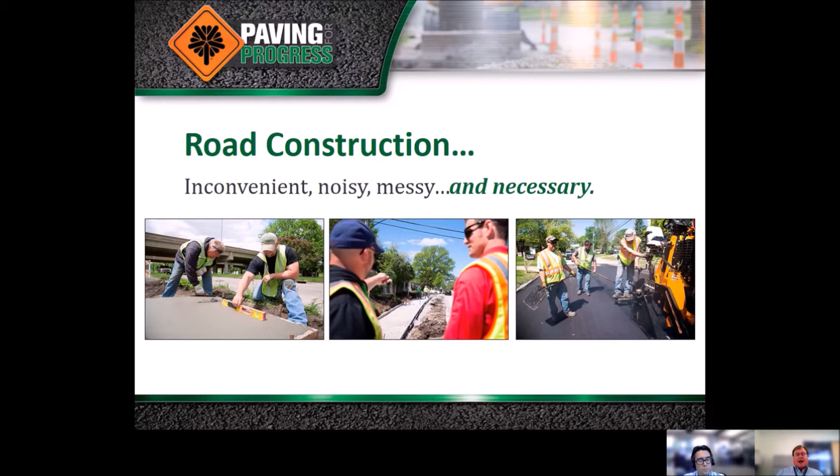So road construction, it's inconvenient, noisy, messy, but necessary. We'll do our best to make it as convenient as possible for you, working around your schedules and access to your homes, but there will be times when you won't be able to access your homes while the construction is going on. We will be able to let you know ahead of time when that's going to happen, but please be patient as we work through the projects.

So what is Paving for Progress? Well, it's the local option sales tax that was approved by voters in November of 2013 and reapproved by voters in November of 2021 to fund street rehabilitation, reconstruction, and maintenance programs throughout the city. It's a strategic data-driven plan where we work on residential and main streets. We work on some streets for proactive preservation, which is why you'll see us working on streets that you may not think are that bad right now, but that's a less costly option than going complete rehabilitation or reconstruction. The goal of the program is to stop the deterioration of our roads.

We're very fortunate to have this voter-approved funding source. It's a unique asset for our community, and of course, it's a way that we get people who drive on our streets that don't live in Linn County to help pay for it.

So with Paving for Progress, we get an additional $18.5 million annually for street rehabilitation and reconstruction. Through 7 years, we've invested $116 million. In the 10 years prior to that, we sold bonds up to $55 million. So we have more than doubled our investment in just 7 years in our roadways. Another good thing about this is we're not selling bonds to do this work. We're paying as we go, so we don't incur debt. And we can make more permanent repairs versus temporary repairs, such as yearly pothole maintenance. This also helps us reduce the burden of maintenance on our streets crews so that they can do other work.

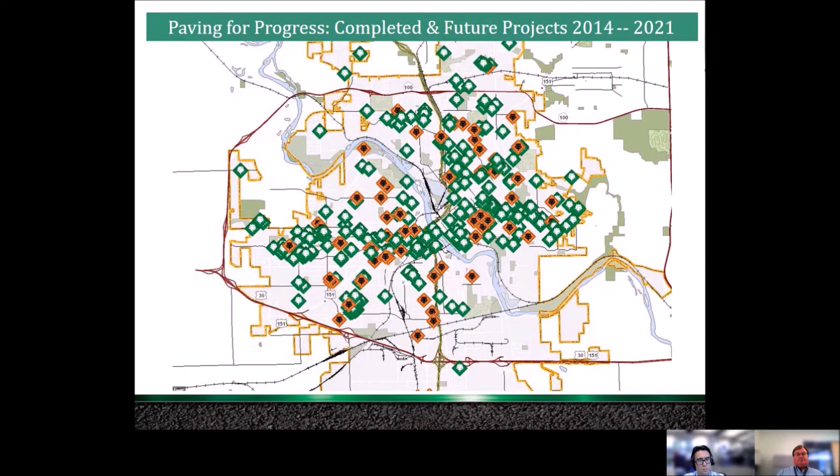So contractors versus city crews. Because of state law contracts, we have to look at how much the bids are for each project. So big contractors are great at large scale projects, specialized work and multiple types of work in one project area, but city crews are better for small scale projects, more maintenance activities, smaller, shorter streets with cul-de-sacs and strict timelines.

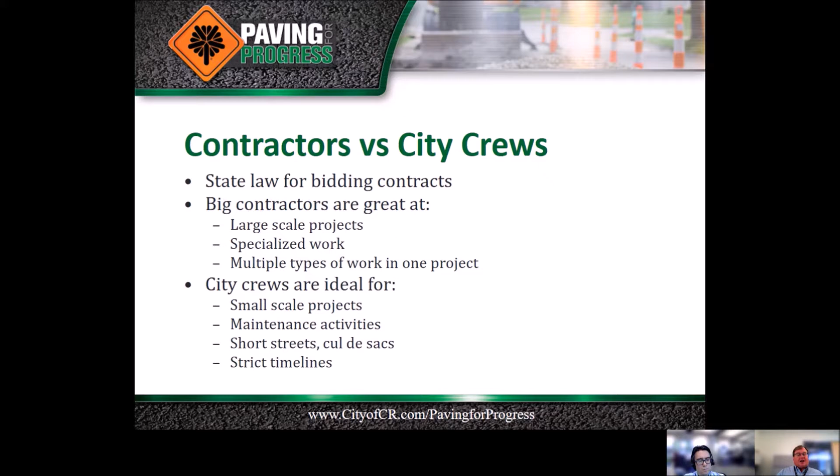And with that, I'll turn it over to Mike Duffy. Okay, thank you, Doug. My name is Mike Duffy. I'm the Street Operations Manager. I'm going to talk about some different types of projects that may occur in residential neighborhoods.

The first is concrete patching. So this is where we come in and remove and replace damaged concrete panels. This would not include some of the minor cracks that you might see along a panel, but we do identify areas where we think that a minor crack may become a bigger problem, whether that pavement is undermined or if there's something going on underneath the pavement that maybe would indicate why the cracking is occurring. Our goal is really to extend the life of the roadway and get the most use out of the current roadway that's there. Some additional work that may be needed that does impact along a project would include adjustments to driveway aprons. That's the place where the driveway actually meets the roadway.

Some spot curb repairs, so areas where a curb has been damaged or is missing, that we will go in and do those sort of spot curb repairs and replace those.

Any sidewalk ramp replacements, so this would include any of the ADA ramps that would not be compliant. We will bring those up to compliance.

Storm sewer intakes, so any location where the curb and gutter section meets a storm intake, we will then, if needed, repair and make those repairs at that time. This work is performed by city crews and is just part of our regular service to the community.

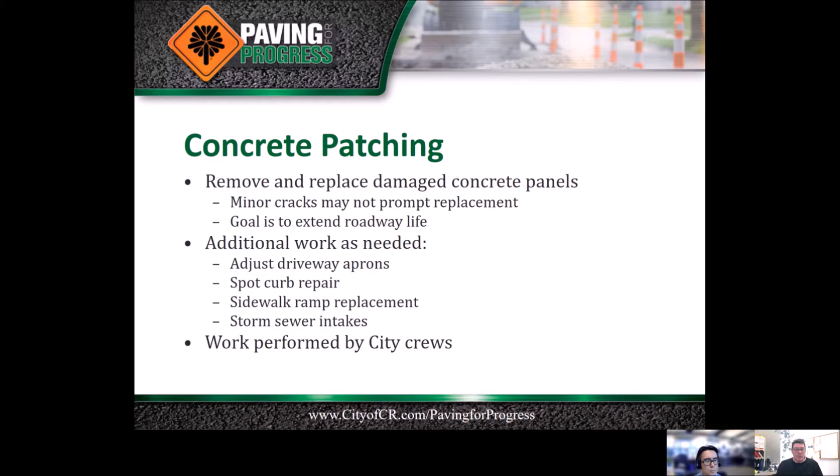Some typical impacts that may be of interest. Lane reductions are probably the most common. So one of the things that will happen is if we're doing one side of the pavement, we'll have to close that side. We do maintain traffic through residential areas. In some instances, we may limit the direction of flow, but those lane reductions are really for keeping our crew safe and for allowing people within the residential areas to still travel those roadways.

There also will be times that we'll have to do individual driveway closures. We do communicate those to the property owners so that they know when they are going to occur. It's only where patches are needed in front of a driveway or where a driveway taper or a section of a driveway is being reconstructed. The average closure time for a project can be up to 2 weeks. We do try and open up those driveway areas much shorter than that, and we ask that you utilize nearby on-street parking during those times.

One thing that's very important on a project is watch for the temporary road closure signs or the no parking signs. This allows us to come in and place a no parking sign in an area where we're going to need to have equipment or where we'll be removing pavement. We ask that you not park in those areas when those signs indicate not to.

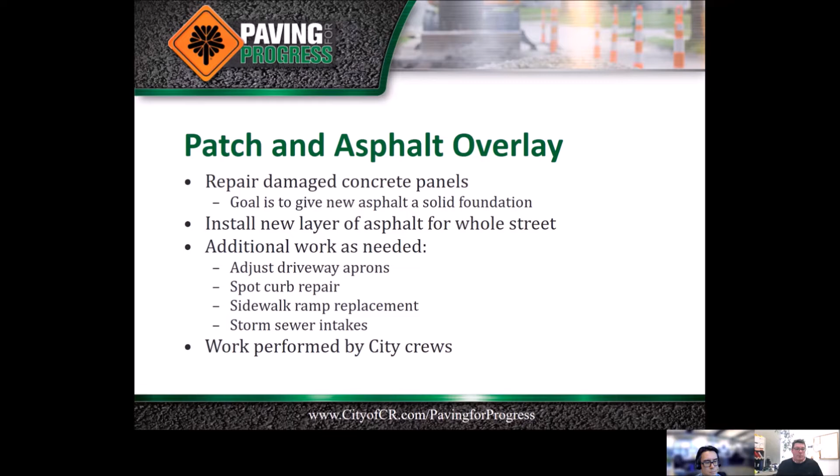We are doing spot curb repairs in many of these locations, so that gives us a good edge to our asphalt pavement and allows for drainage to flow along that curb line. We do the sidewalk ramp replacement, so any ADA work that we have to do at sidewalk ramps, we would do that at the time that we're doing construction, and we do adjustments at the storm sewer intakes. Again, the city forces will be providing this service.

Some of the typical impacts for these types of projects are lane reductions for patching, primarily for the concrete work. When we do an asphalt overlay on a street like this, it will be closed while we are placing the asphalt. This allows the material to cool, and we will coordinate with property owners to let you know when we are going to be doing those asphalt overlay projects.

Individual driveways could be closed during this time period. Again, we will provide some advance warning when we're going to be doing this type of work, only where patches are needed in front of driveways. But when we do the overlay work, there will be sections of roadway with new asphalt that will not be able to be driven on.

Average closure for the entire project will be up to 2 weeks. At the time that we're doing the asphalt work, we have the project closed for generally about 2 days.

Utilize nearby on-street parking when possible, and watch for temporary no parking signs. When we come in with the equipment and are doing the work, we ask that you not park in the areas impacted by the project.

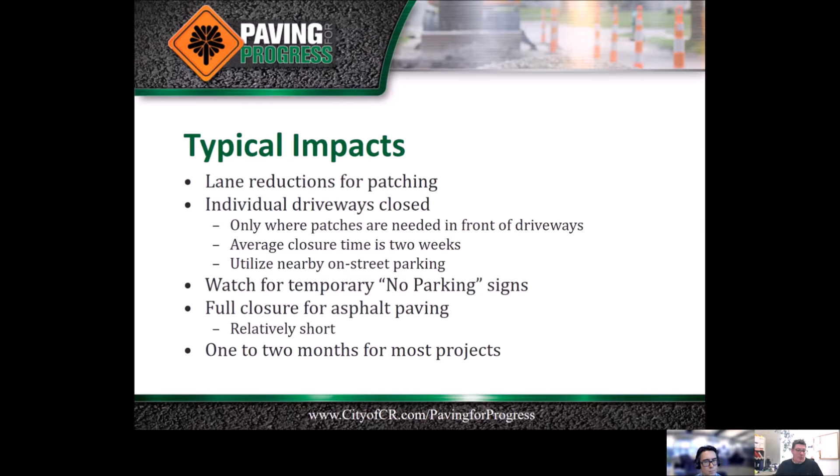Full closures for asphalt paving are generally relatively short. We come in, we do the work. Once the asphalt cools, we get traffic onto that pavement right away. Most of the projects, from start to finish, take 1 to 2 months to complete.

Common concerns: service impacts. We're often asked if there's going to be no water or sewage during construction. We make all efforts to avoid that unless there's a specific location being worked on, and that would be the only time there'd be a water or sewage outage. None are anticipated on these projects.

Mail delivery is normal. There may be a situation where we have to remove a mailbox; we temporarily set those adjacent to the location where the mailbox is. That generally occurs with any curb or driveway reconstruction we have to do at the time of construction, and those are coordinated with the property owners.

Waste bins need to be placed at the edge of the property on normal collection days. If construction blocks a garbage truck, the crews are responsible for getting the bins to where they belong in order to be picked up.

Asphalt overlay projects: this is where we come in, clean and prepare the existing roadway surface, and install a new layer of asphalt. This work is provided or performed by city crews.

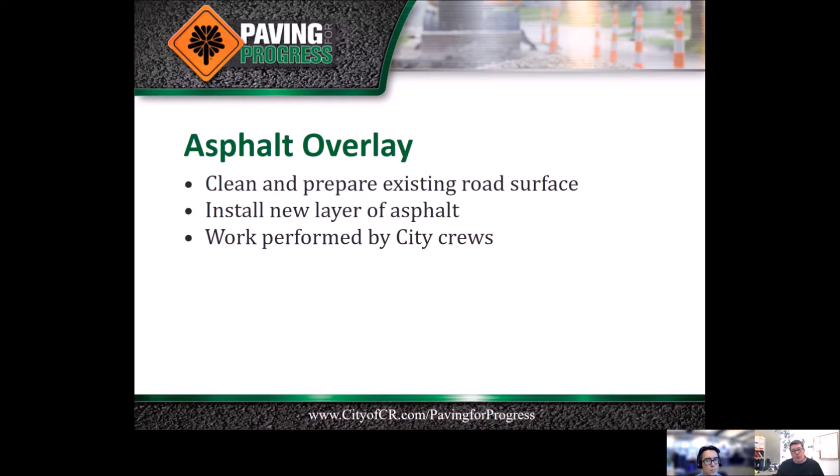On asphalt overlay projects, some of the typical impacts are a full closure during paving. While the pavement is being placed and the asphalt is being laid on the roadway surface, it needs to cool, and we do not allow traffic to drive on it. It usually takes a day for that cooling to take place, and then access is reestablished for the evening.

It works well if you're away from the home during that day. If you do need to get your car out of the driveway, do that before the project starts. Otherwise, access will be limited until the evening.

This is short-term construction. It starts and ends in a single day for the asphalt overlays.

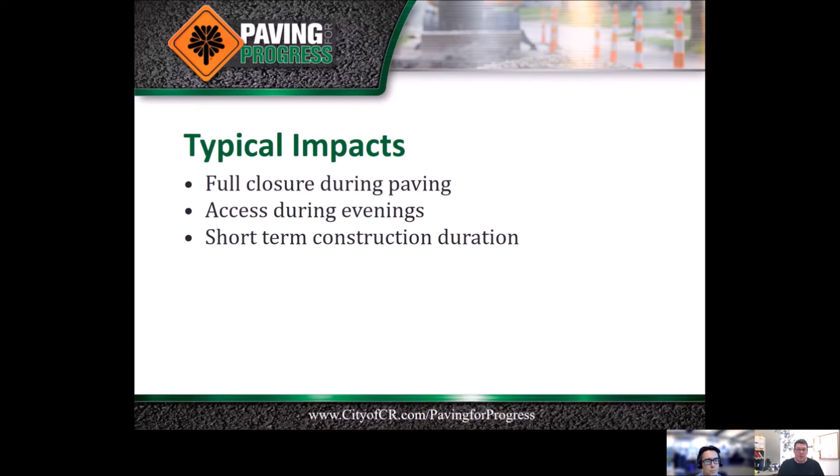Common concerns: service impacts. We're often asked if there's going to be no water or sewage during construction. We make all efforts to avoid that unless there's a specific location being worked on, and that would be the only time there'd be a water or sewage outage. None are anticipated on these projects.

Mail delivery is normal. There may be a situation where we have to remove a mailbox; we temporarily set those adjacent to the location where the mailbox is. That generally occurs with any curb or driveway reconstruction we have to do at the time of construction, and those are coordinated with the property owners.

Waste bins need to be placed at the edge of the property on normal collection days. If construction blocks a garbage truck, the crews are responsible for getting the bins to where they belong in order to be picked up.

Asphalt mill and overlay projects. These are projects where we come in and mill off the existing asphalt surface. We will then make some repairs to the concrete base, and then reapply that asphalt surface to the pavement. So that involves grinding off that top layer of existing asphalt.

There will be some noise involved in that, since it is grinding that off of the existing pavement. Some curb replacements for a couple projects in particular, that being 6th Avenue Southeast, 40th Street Drive Southeast, B Avenue Northwest, and Janice Drive Northwest.

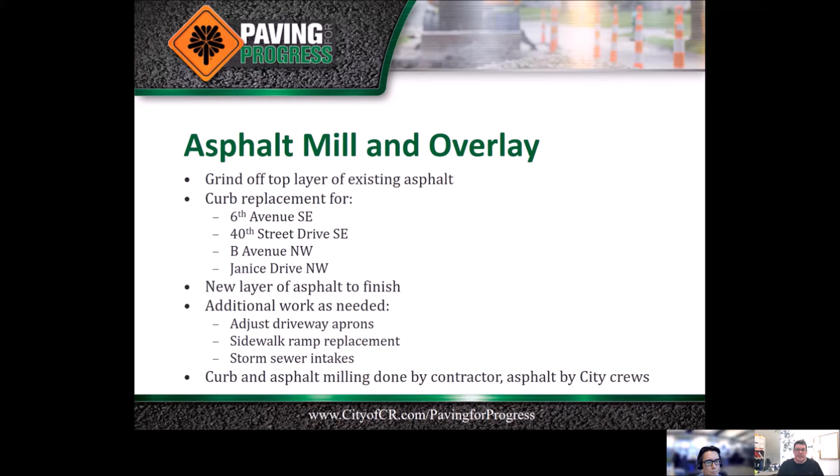Some typical impacts: lane and driveway closures during curb work. So any of the work specific to the concrete work or the base will have some closures during that time. Those are generally very specific because this is more spot work.

At the time of the asphalt work, there will be project closures that will impact the entire street. Those will again be allowed access back in the evening, so once that asphalt material has time to cool, property owners will regain access to their driveways and properties.

Access to businesses and schools is maintained during this time period. We do provide some temporary locations where you can gain access to those facilities. Watch for temporary no parking signs during this project—that's very important for us to have the vehicles removed so that we can do our work.

This type of work takes approximately 2 weeks, and it's often done in stages, so you'll see some start and stop between the different phases of this work: when the grinding occurs, when the concrete work occurs, and then when the asphalt work is completed.

Common concerns: service impacts. We're often asked if there's going to be no water or sewage during construction. We make all efforts to avoid that, unless there's a specific location being worked on—that'd be the only time there'd be a water or sewage outage. There are none anticipated on these projects.

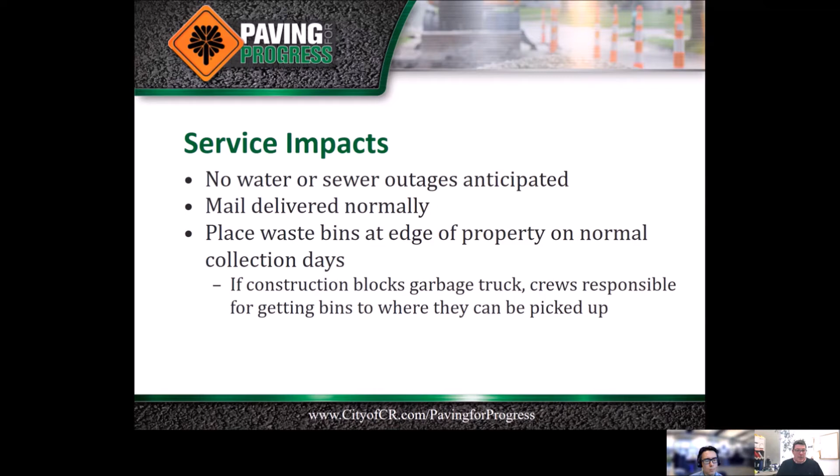Waste bins need to be placed at the edge of the property on normal collection days. If construction blocks a garbage truck, the crews are responsible for getting the bins to where they belong in order to be picked up.

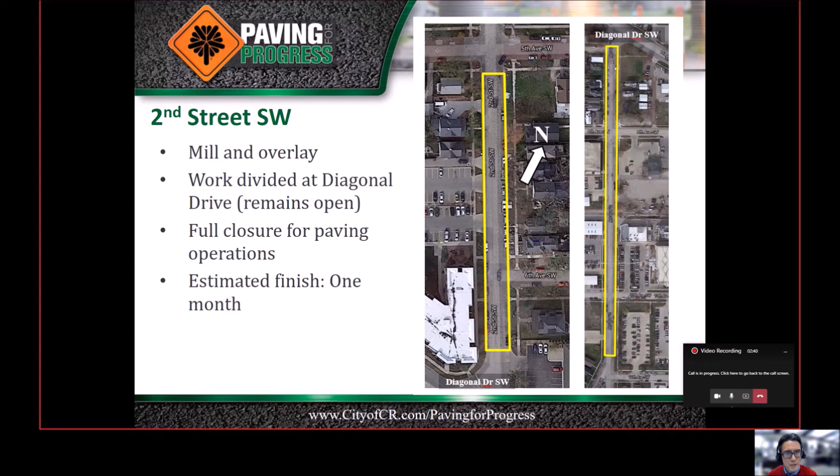But if you anticipate any problems, go ahead and let us know through email or phone or any of the contact information we provided. We believe we can probably get this project done within about one month for both sides of Diagonal Drive. But if you have any questions, go ahead and let us know.

The 6th Avenue Southeast project is going to consist of curb repair, mill, and overlay. Both sides of the street are going to have their curb replaced. That'll take a couple of weeks, depending on how the contractor wants to do it. They may do one side and then the other, or they may close half the street and then do the other. We'll have some more details for you as soon as we know who the contractor is going to be and when they're going to start.

Look for some door hangers and a letter from Streets, and they'll explain a little bit more about how they plan to do it. So the closures could be a little bit fluid on the curb side of things, but for the pavement portion, a contractor will come in with a machine to grind off the top layer of the pavement, and city crews will follow afterwards to put down a new layer of asphalt. Once they pull back that asphalt, they may need to do some patching underneath to make sure everything is in good condition before the final layer of asphalt.

All told, expect the work between the curb and the asphalt work to take about two months. That won't be a solid two months - since there's multiple crews, there might be a week or two delay in between each portion. But if you have any questions, go ahead and give us a call or email through some of the contact information provided previously.

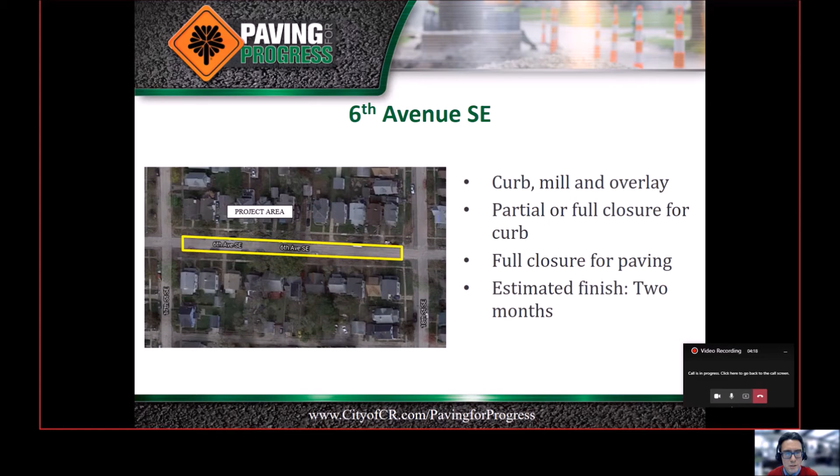This year on 21st Avenue, 22nd Avenue, and Westdale Drive, we're going to be doing a combination of concrete patching and patch and overlay. Patching for 21st and 22nd, and then the addition of a final layer of asphalt onto Westdale Drive. The work in this area will be broken up into sections, so the whole area won't be closed at once. We'll probably do one street at a time, and some of these locations will be one of the first ones that we do.

So keep an eye out for some information from Streets. They may put out door hangers or post some letters at apartment entrances to try and let you know what's going on. If you are somebody who tends to park on the street, keep an eye out for no parking signs. Make sure vehicles are out of the way so that we can get the road paving underway.

Please expect lane closures for patching. We won't have to close down the street totally for the concrete portion, but you may have to get around some localized closures to be able to do that. We will make sure that access to large parking lots is maintained.

If there is work that needs to be done in front of your driveway, we will do our very best to work on it half at a time or make it so that you don't have to get punted out to the street while we do that. But when driveway work is done, that takes about two weeks or so to finish.

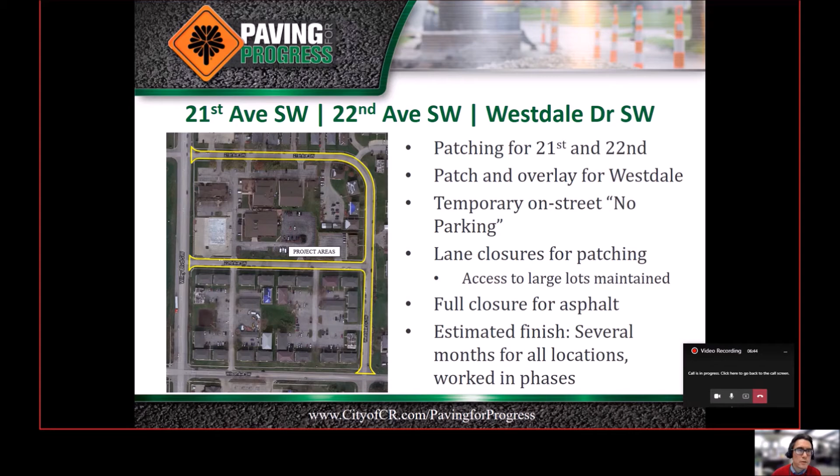On 29th Avenue Southwest this year, we're going to be working just east of Edgewood Road Southwest. We're going to be doing some concrete patching in that area, some pretty extensive work, and due to the relatively high amount of traffic for that street, we are going to do a full closure. There'll be a hard closure at Edgewood Road and Chapel Drive Southwest, and our crews will work with the folks who have driveways frontaging that area to see if we can get you a little bit closer while work is underway. But do plan on that being closed for approximately a month.

The full closure will help that move a bit faster, but by the end it'll be looking real nice. So if you have any questions, give us a call or email or contact us through some of the means provided, and we'd be happy to help you out.

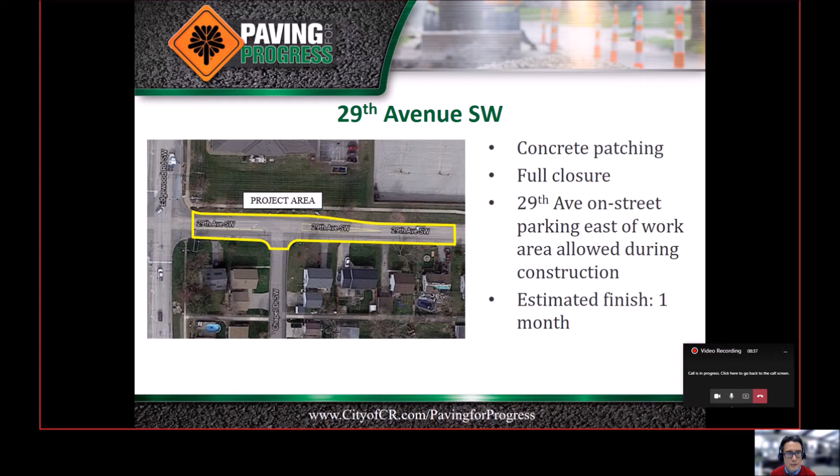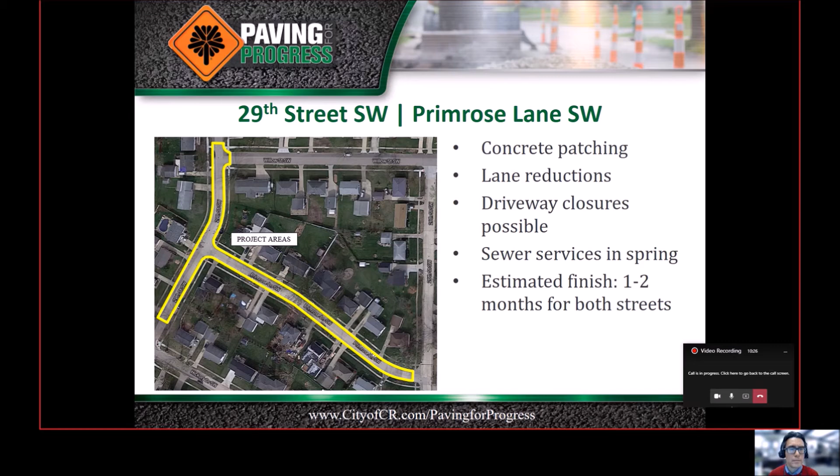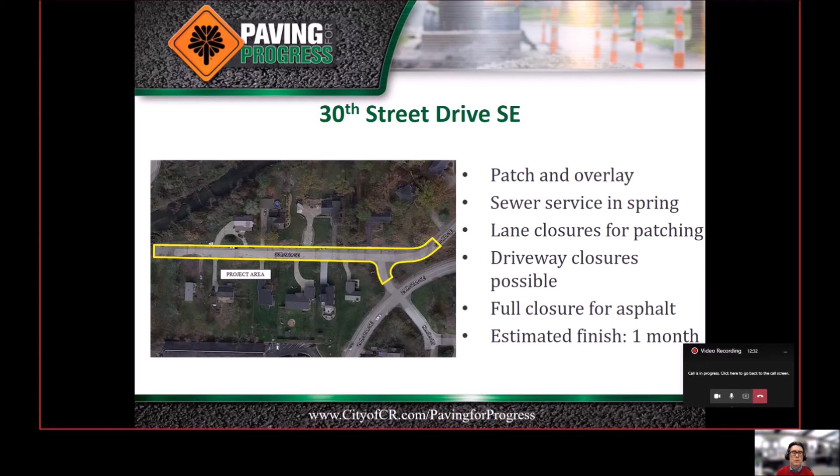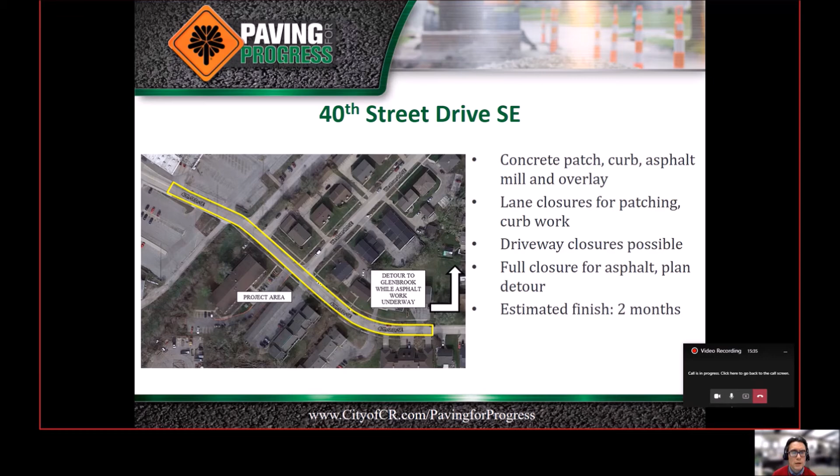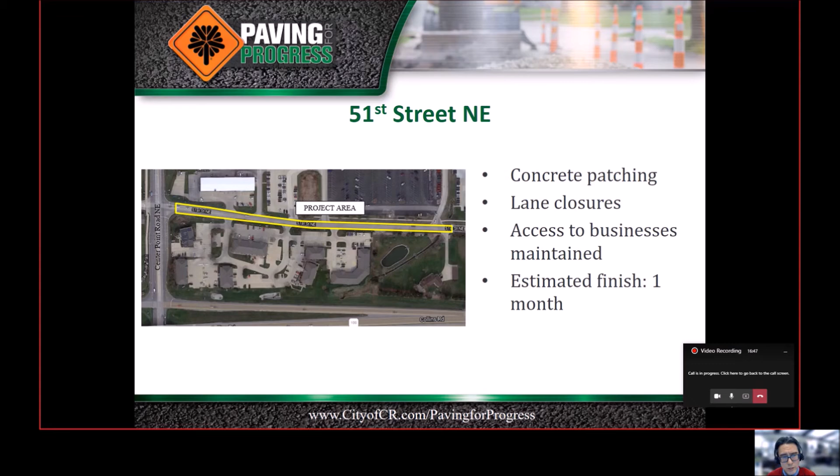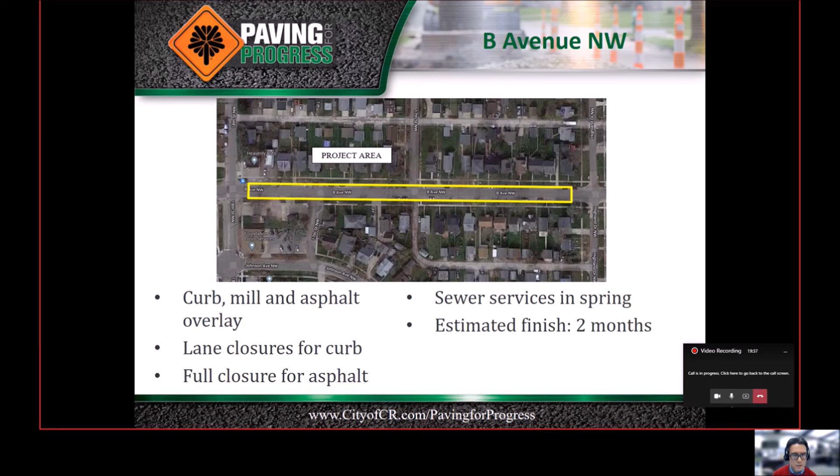Once that curb work starts in earnest, that's going to be the start of your 2-month period. Again, look for door hangers and a letter from the Streets Division, which will give you more information and contact information for the contractor who is ultimately hired for the curb and milling work. If you have any questions, give us a call or send us an email. Happy to help you out.

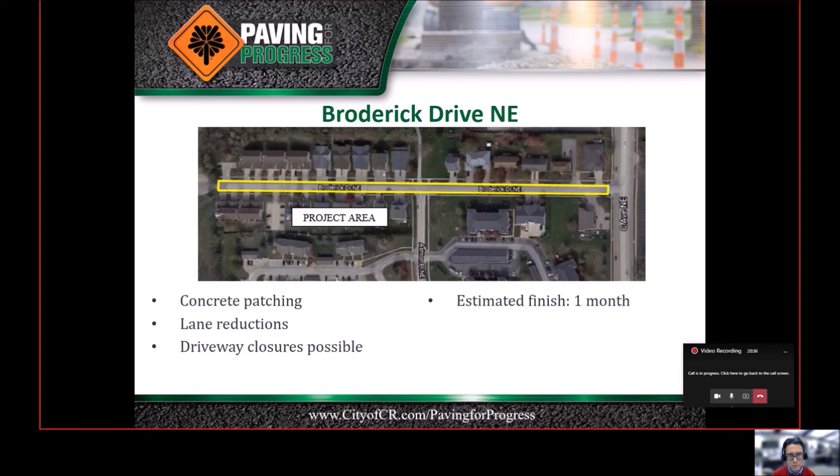On C Avenue Northeast, we're going to be doing some concrete patching this year between 24th Street and 27th Street. Before that starts, though, we will be doing some sewer service replacement in the spring. If that's necessary for your house, you will have already received a letter letting you know about that. The sewer service work will be done by a contractor, separate from the work done by city crews, which will happen later in the year.

When we do get concrete patching underway, please expect lane closures during that time. The street will not fully close. You'll be able to get through, but it might get a little tight. So do what you can to help keep our workers safe while they fix the street.

It may become necessary, if the concrete in front of your driveway is badly cracked, to partially or fully close your driveway to get that fixed. I know there's not a whole lot of space in that street for on-street parking, so we'll try to make sure there's some space for you to park so you don't have to walk too far to get back home. But when that is the case, usually we can have you back in your driveway within about 2 weeks.

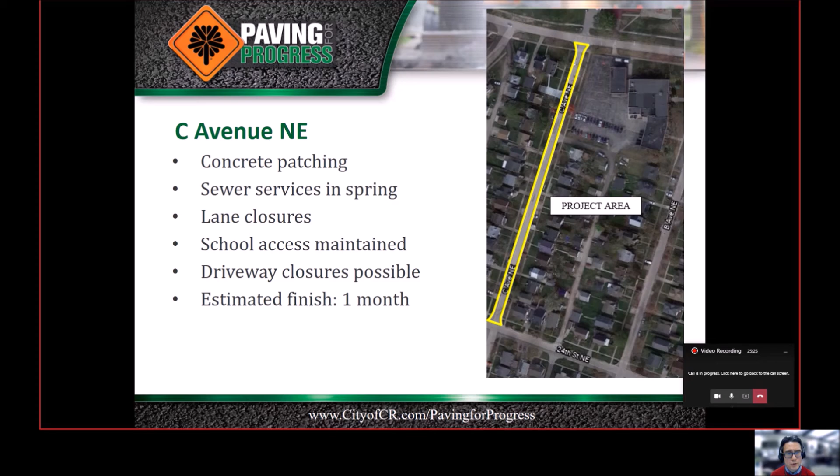School access will be maintained during the project. Overall, it should take approximately 1 month for the work to get done. If you have any questions, give us a call or send us an email, and we'd be happy to help you out.

On Glen Elm Drive Northeast, we're going to be doing some concrete patching this year between 42nd and Wenig Road. While that's happening, please expect lane reductions. The street won't ever have to fully close, but we'll need to give our workers some space to get the work done there, so help us keep them safe.

Depending on the quality of the concrete in front of your driveway, driveway closure may become necessary to get that concrete fixed. If that's the case, please make use of nearby on-street parking. With normal weather, we can typically have you back in your driveway within about 2 weeks.

Overall, we expect the project to take between 1 and 2 months, since it's a pretty good stretch of street. Of course, that is heavily dependent on weather, but if you have any questions or concerns, give us a call or send us an email, and we'd be happy to help you out.

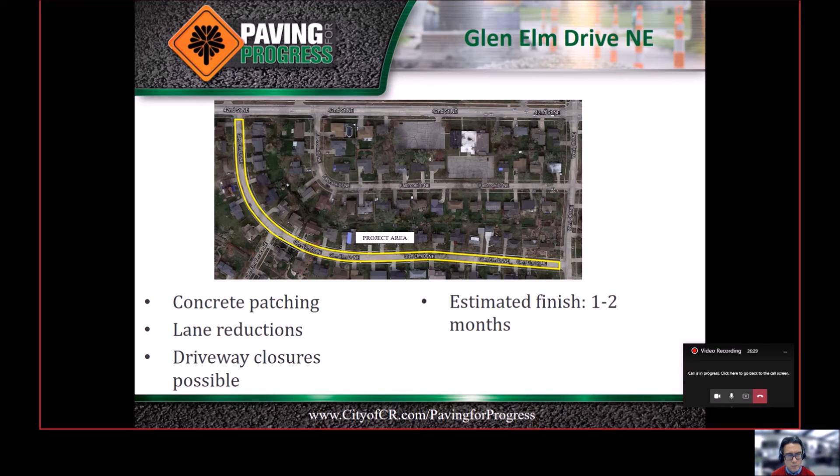On Greentree Court Northwest and Hidden Hollow Lane Northwest, we're going to be doing some concrete patching this year, but to start the year, there will be a contractor hired by the city to come in and do some sanitary sewer service replacements. If you are a house that needs to have that done, you will have already received a separate correspondence from us about that, but we'll have that done before we start on just the general concrete patching, which will take place later in the year.

While that's underway, please expect lane reductions, give our crew some space to be able to do their work and keep them safe. And if there is concrete that needs to be done in front of your driveway, a partial or full driveway closure may become necessary to make sure that that's patched up. If that's the case, please make use of nearby on-street parking.

With normal weather, we can usually have you back in your driveway within about 2 weeks' time. That varies a little bit. But overall, between the two locations, we'll split it up so it's not the whole section worked on at the same time. We'll break it into pieces to try to minimize overall disruption.

But from start to finish for the two streets will probably be about 1 to 2 months, depending on weather, temperature, rainfall, etc. So keep an eye out for door hangers and notification from the streets department with more specific information about start dates. And if you have any questions, give us a call or send us an email.

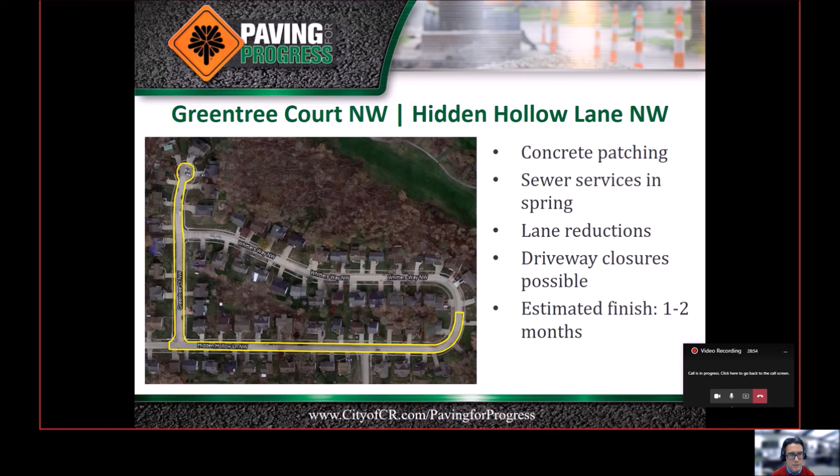On Janice Drive Northwest, we're going to be doing some curb and asphalt work this year between Dennis Drive and the area that was recently finished on Johnson Avenue Northwest. A contractor will first arrive in the spring.

There's a couple of sanitary sewer services on that street that need to be switched out before we start the pavement work. If you are one of the houses that needs to have that done, you will have already received a notification in a separate mailing to let you know what's going on there. But after that, a separate contractor will come in to start the curb work.

Depending on how the contractor decides to do that, they may do one half at a time or close pieces of the street at one time to get that done. That part will be up to them, but we'll communicate how they plan to do that in separate correspondence closer to construction start, as well as a more specific start date. So keep an eye out for a door hanger, which will have that information for you.

Once the asphalt portion is underway, an asphalt grinding crew will come through and scrape off the top layer of the existing asphalt, maybe make some repairs to the foundation as necessary, and city crews will follow pretty closely to get the new layer of asphalt down on the street.

While that is underway, it will require a full closure for the work, but fortunately, mostly that only requires closures during the day. Usually we'll be able to get you back into your driveway by the evening. When that asphalt is exposed, it is safe to drive on.

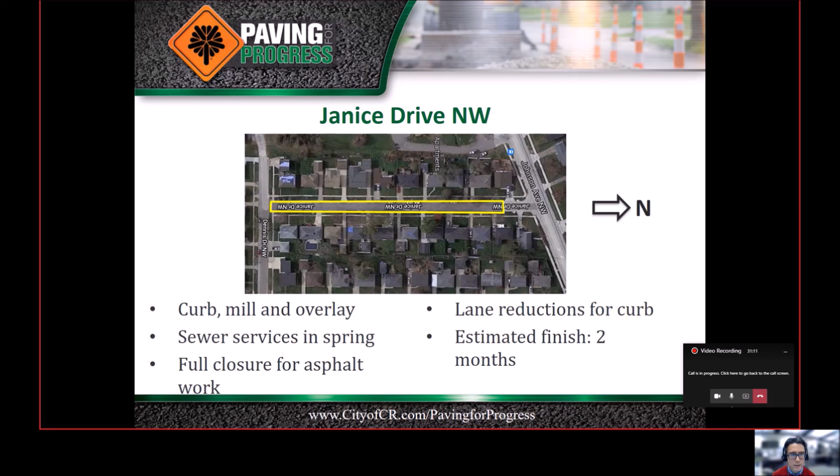On Josephine Lane Northwest between Dennis Drive and the recently finished Johnson Avenue Northwest, we'll be doing some mill and overlay work this year. The contractor will come in with a milling machine to grind off the top layer of the existing asphalt. Some crews may do some patching with the exposed asphalt if there's any problems they see once that's opened up. But the city crews will follow with their own paving machine to put a new layer of asphalt over the top.

While that work is being done, both for the milling and the overlay, it will require a full closure. However, that will be during the daytime, so in most cases we'll have you back in with access to driveways by the evening.

That milled surface is safe to drive on. Just take it a little bit slower for the sake of the road and for your car. When that new asphalt goes in, that is pretty hot, so you will need to stay off of that for at least a couple hours, but again, by evening you should be able to get back in.

Overall, from start to finish, we expect that work to take between 2 weeks and a month, depending on how weather plays out and what problems, if any, they find when they peel back that top layer. So look for door hangers with specific start dates and future correspondence with more information on how that project will impact you.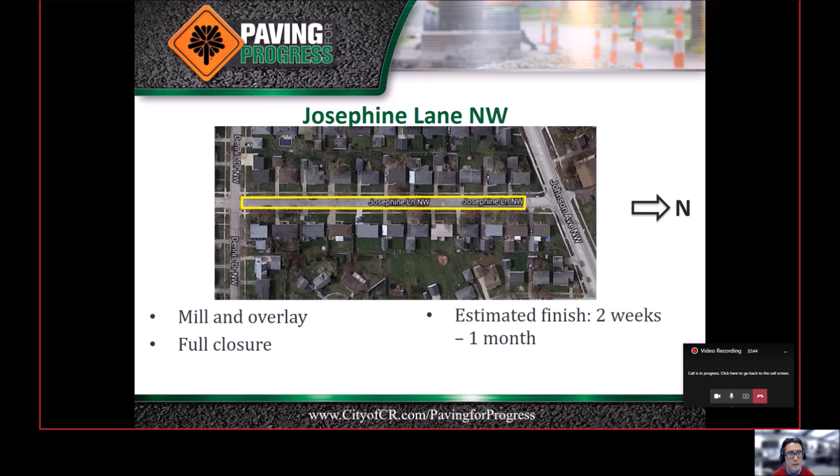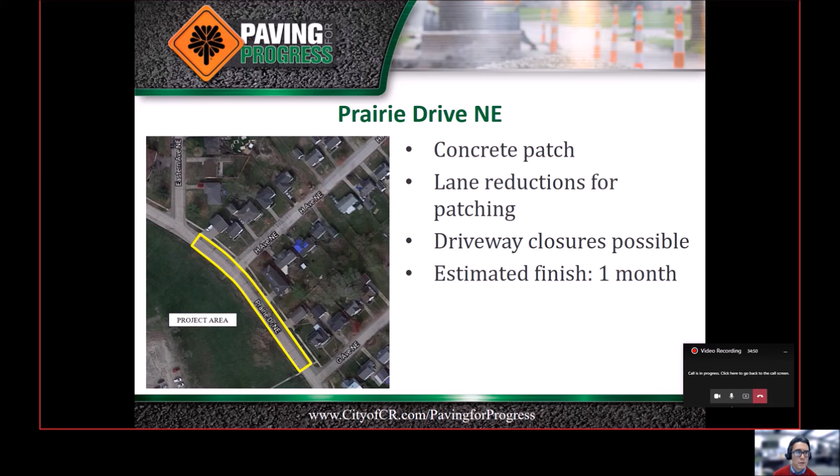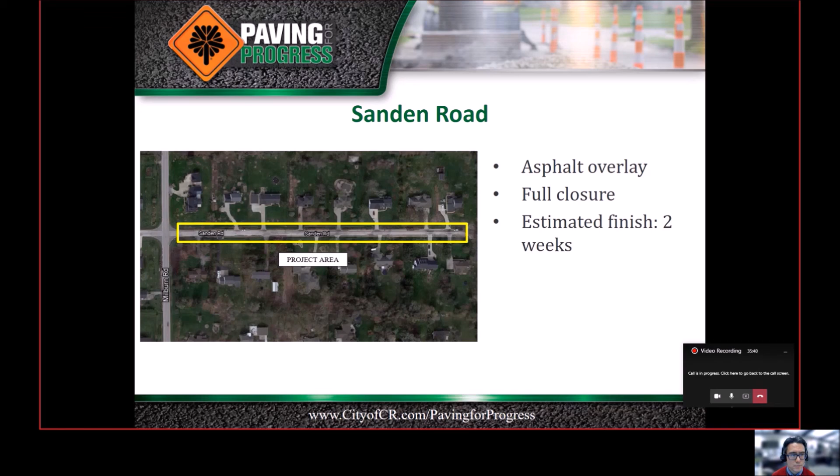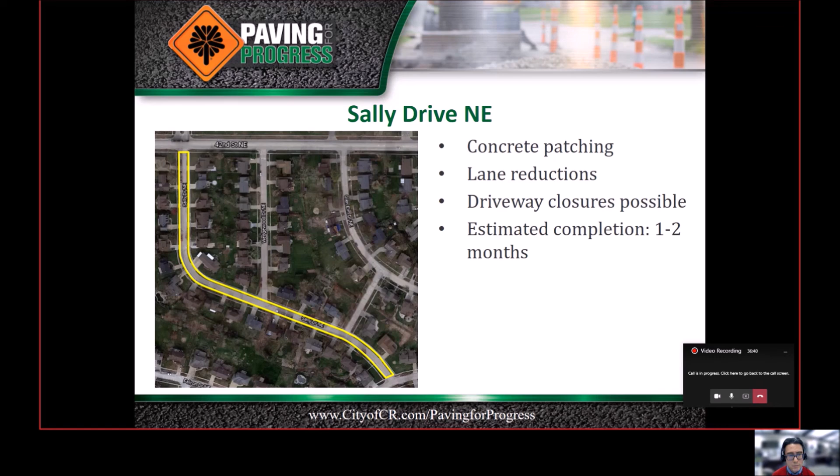Look for some door hangers and future correspondence from the Streets Division with further information on a specific start date and impacts to your property. But if you have any questions, feel free to give us a call or send us an email.